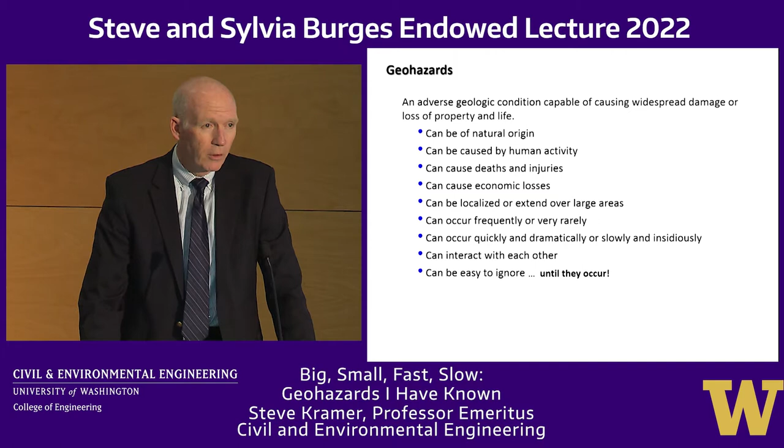Some occur very frequently, some occur only rarely, some occur very quickly and dramatically, and others much more slowly. They can interact with each other and cause additional damage, and they can be very easy to ignore, and they often are ignored, at least until they occur. So some of the examples include landslides, like the Oso slide that occurred in this area a number of years ago, but also flow slides, debris flows, and rockfalls, all capable of causing tremendous amounts of damage.

Earthquakes are important geohazards. They can cause soil liquefaction. Fault rupture can damage structures like this dam in Taiwan. Soils can amplify ground motions very strongly, and in some cases, stronger than the structure was anticipating, and lead to structural problems. And they can cause failure of lifelines, like buried gas pipelines.

Volcanoes certainly are geohazards, not just due to lava, as in Hawaii, but due to lahars, large landslides that come off the flanks of volcanoes, and they're hazards often for Mount Rainier.

Expansive soils are soils that are very sensitive to water. They swell when water is introduced to them. They shrink when the water goes away, and that causes the ground surface to raise and lower seasonally during wet and dry seasons. That causes a lot of damage, particularly to brittle structures, lightweight structures. It causes a tremendous amount of damage to pavements. This hazard doesn't get a lot of publicity, but it causes about $13 billion in damage a year in the United States.

Sinkholes are a big problem in certain areas like Florida, where they have a lot of limestone, and the limestone will dissolve in water, so flowing groundwater produces caverns that, if they become large enough, have a roof that collapses.

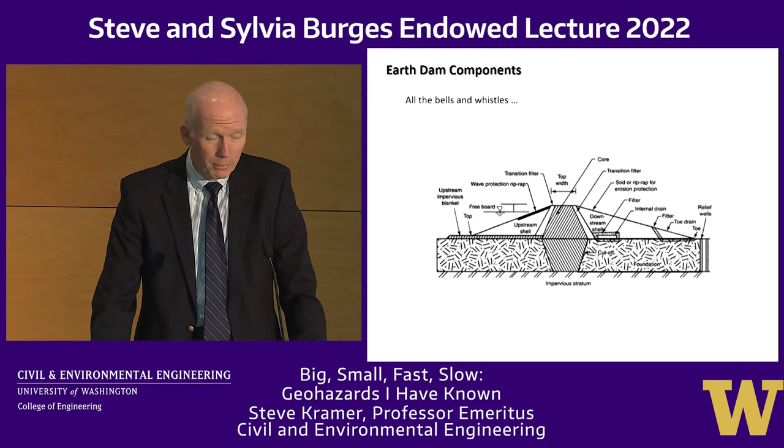Earth dams can be complicated. They're put in complicated areas geologically, at least often, but they have things like clay cores for impermeability and shells that hold them up, and drains and filters and all kinds of things. All the bells and whistles are kind of indicated here. And I knew that my dam, I called it Kramer Dam, was not going to have all of the bells and whistles, but it would have some at least. It was going to have an 8-foot wide crest, 3-to-1 upstream slope, 2-to-1 downstream slope, and it was going to be almost 900 feet long.

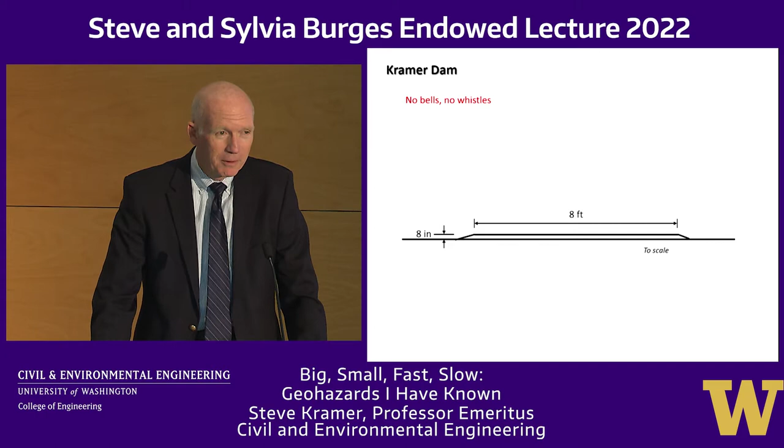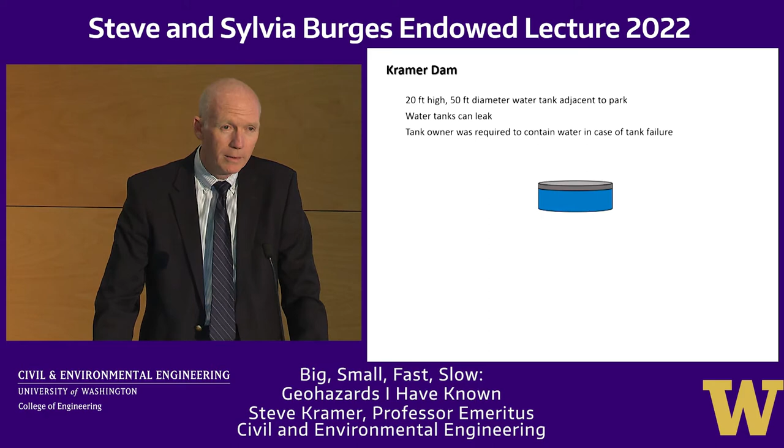So pretty cool. But this drawing turned out not to be to scale, and it's really not to scale because I was then told that my dam was going to be 8 inches tall. So if I drew it to scale, it would look more like this. And my Kramer Dam turned out to be needed because a water tank was going to be constructed on a level plot of ground near a park. And water tanks can leak, and the owner of the tank was required to contain the water in case the tank failed. And so my dam, Kramer Dam, provided that containment. I'm happy to say it was successfully constructed in 1982. Don't have any photographs, but it marked an illustrious start to my career as a geotechnical engineer.

So we'll move on to something a little bit bigger. I'd like to talk about some projects that I've been involved with. They don't necessarily all use or are based on my research. Some of them did. Some of them should have maybe. This is one of the early ones that I got involved with, called the Storegga slide, which is a very large landslide, a submarine slide that occurred off the coast of Norway about 8,000 years ago. It removed 2,500 to 3,500 cubic kilometers of sediment, generated a tsunami that struck Norway, Scotland, the Shetland Islands, and the Faroe Islands with run-ups up to 30 meters, 100 feet.

The head wall is 320 kilometers long. It ran out to 400 kilometers and then continued as a turbidity current and deposited turbidites more than 900 kilometers away. It became of interest because of the 1997 discovery of the Ormen Lange gas field, which was the third largest gas discovery on the Norwegian shelf. Oil and gas are big business in Norway. Their country depends on that in many respects. And so it was a consortium of oil companies that did the exploration, and Norsk Hydro and Shell Norway were the leaders of it, and they were responsible for investigating the development of this gas field.

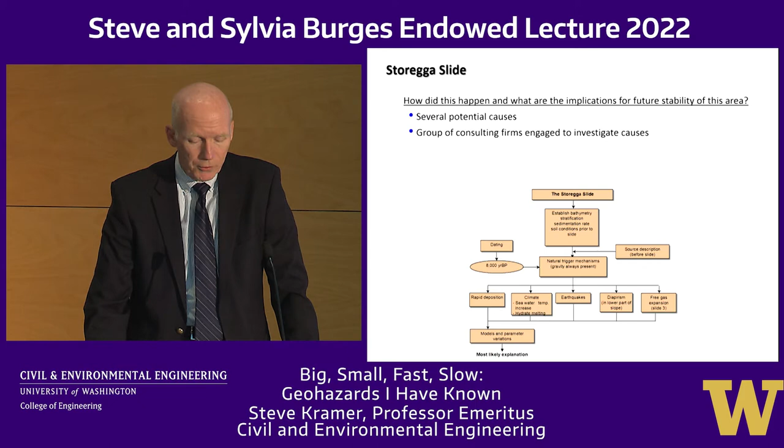And they came up with an approach that's described in the flow chart here. There were about 5 potential causes that were initially investigated, and that was narrowed down to 3 pretty quickly. They also assembled a multidisciplinary team of experts to review these investigations and advise them as they went through their processes. And this included geologists, tsunami experts, sedimentologists, seismologists, oceanographers, and an earthquake guy, who was me.

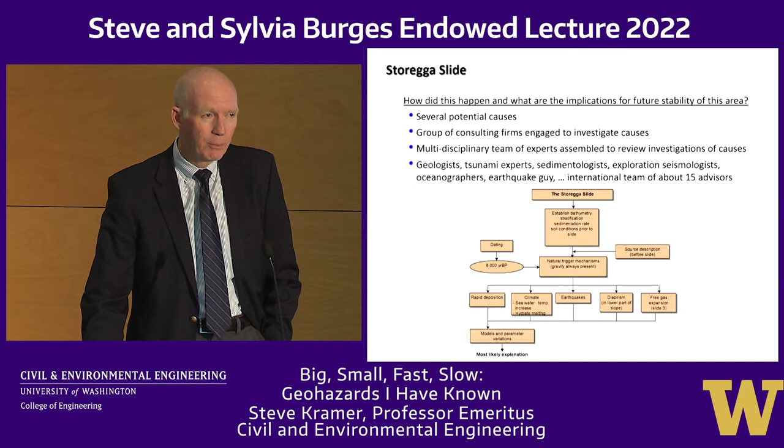It was a very international team. There were probably 6 or 7 countries represented on this, and a really, really interesting group of people to work with. Of the causes, one was rapid sediment loading.

As these sediments were being deposited, if they were deposited very quickly, they would tend to build up pore water pressures within the sediments. And it was known that a lot of landslides had occurred repeatedly coming off of the North Sea fan. They've been measured and dated back as far as 500,000 years. Numerical modeling of this whole process indicated that there would be pore pressure ratios on the order of 20 to 30% or so. So significant, but not enough to explain the triggering of that particular landslide.

Gas hydrates was another possibility. I knew nothing about gas hydrates going into this process, but they could have melted as the waters warmed after the last glaciation. And gas hydrates are mixtures of methane and water that freeze effectively. And when 1 cubic meter of gas hydrates thaw, it produces 164 cubic meters of gas and a little bit of water. And so when these things thaw out underground, the pressures, the expansion pressures that are developed are tremendous.

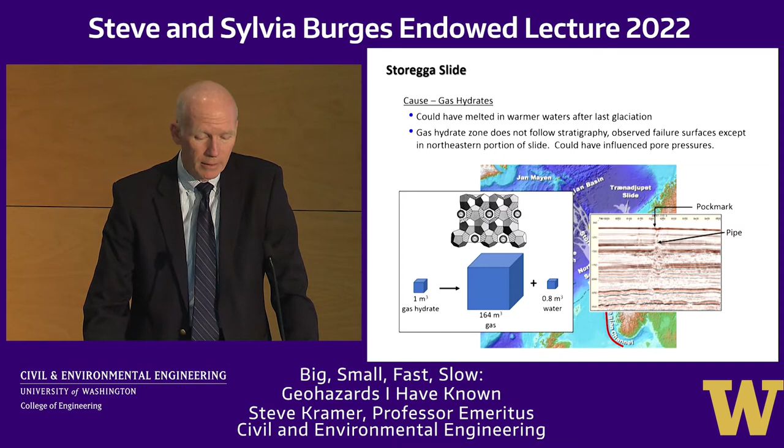And they can cause gas to flow up towards the surface and be ejected explosively at the surface. They create large craters. They're referred to as pockmarks, and they're visible in bathymetry all around the North Sea area. But the gas hydrate zones in this particular area didn't follow the stratigraphy or the observed failure surface, except for part of that slide. They could have influenced the pore pressures, but it was not thought to be capable of having triggered that landslide. The third main cause was earthquakes.

And earthquakes in this region were caused by isostatic rebound of the Earth's crust after the weight of the glaciers went away as the glaciers receded. And from faulting in Norway, magnitude 7 or greater earthquakes were likely to have occurred in this region. It's still the most seismically active area within that region. And so the conclusion that was come to was that an earthquake was likely the trigger for the Storegga Slide that had occurred.

So there were concerns on the part of the consortium and the Norwegian government about the safety of this potential development, the risk that they would be undertaking in developing it. The development was going to require templates, large steel templates that would be anchored to the seabed. Each template had 8 cells in it through which drilling would take place. The gas that was removed would have to be sent to an onshore gas processing plant in Nyhamna on the west coast of Norway through 2 30-inch pipelines.

There are strong currents in this area, about 1 meter per second. And so the pipelines needed to be protected. So they'd be trenched in areas where that could be trenched with softer sediments, and they'd have to be covered by rock fill in other areas. That gas was going to go to the UK, and that was going to require construction of a 1,200-kilometer pipeline from Norway to the UK. So this was an enormous project that was going to require billions and billions of dollars to develop.

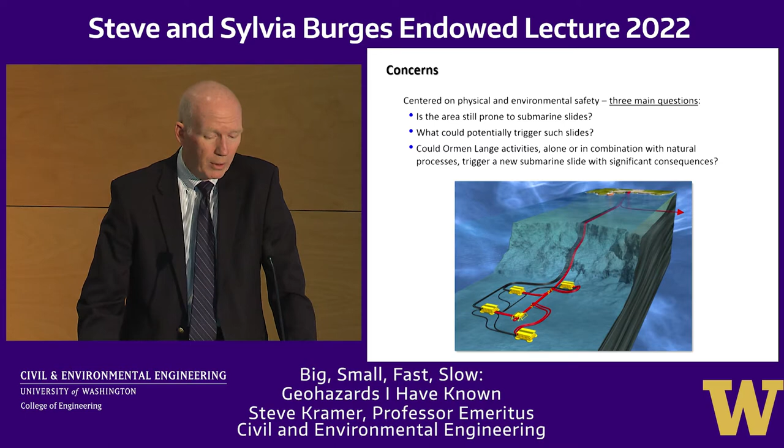So the safety considerations centered on 3 main questions. Was the area still prone to submarine slides? What could trigger those types of slides? And could the activities associated with developing this gas field in combination with natural processes trigger a new slide that would have severe consequences? So the instability threats were divided into 3 categories.

One was very large Storegga-like slides. Another was smaller slides that could have wiped out multiple installations, and then smaller slides that could have threatened pipelines and individual installations. And so there were the natural mechanisms that had been discussed previously, and then there were a series of mechanisms that could have been caused by the proposed or anticipated construction. Anchor forces, rock filling, temperature changes due to the drilling, well blowouts, subsidence due to depletion of the reservoir as the gas was removed, and then induced seismicity.

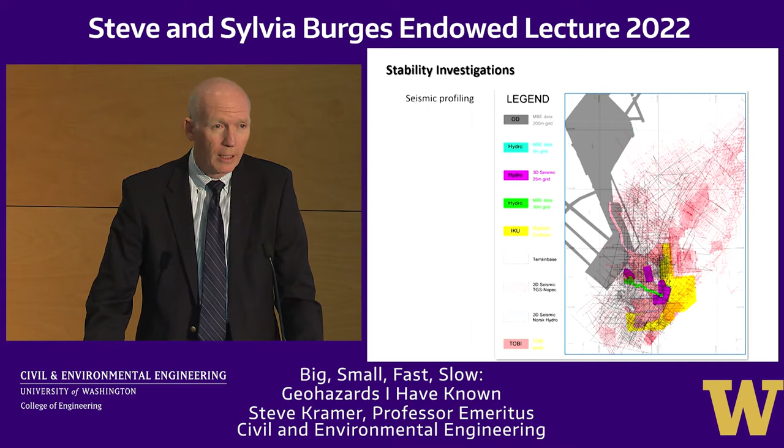And so this initiated a tremendous investigation. These are the seismic profiling lines here. They show up nicely. There were hundreds, if not thousands, of P-wave velocity profiles that were developed to essentially look under the seabed. It's kind of like an ultrasound in many respects.

That was supplemented by borings that were put in under very difficult conditions. You had to go through 250 to 1,600 meters of water before you hit the seabed, and then drill 500 meters through very difficult materials in order to advance your borings. But that was done, and all of that information together provided knowledge of the bathymetry of the region, of the surface texture, and of the stratigraphy, which included both glacial and interglacial deposits.

All of this information led to an understanding of the original Storegga slide. It had initiated about 150 kilometers downstream or downslope of the current scarp, and then worked its way backward through a series of retrogressive slides, as landslides often occur. It stopped when it reached the overconsolidated material, the material that had been compressed by the weight of the glaciers and was denser and stronger.

So this kind of combined geologic engineering model of the original Storegga slide was very helpful in investigating the current stability by means of static and dynamic slope stability analyses, runout analyses, tsunami analyses based on potential landslides that could have generated them. All this was done within a risk-based framework and came to the conclusions that none of the project-related activities were capable of causing such large landslides. And a really big one was impossible, largely because there was nothing left to slide. All the soft stuff had been taken away by the Storegga slide.

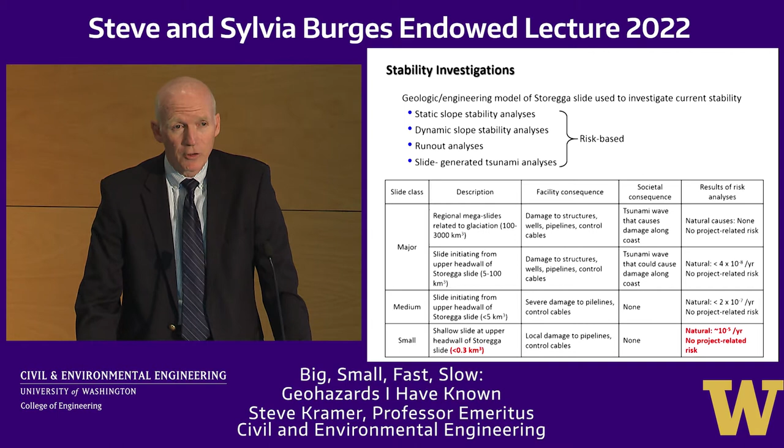And so the Storegga, or the Ormen Lange field was developed. It began pumping gas in about 2007 or so, and has continued since that time and provided a source of energy without any, at least geohazard-related, difficulties.

So it was, to me, very interesting to work with this interdisciplinary group of people to see the state-of-the-art tools that they all had to use, the technologies that they used to address this problem that had many, many moving parts. Very interesting to work with them and learn about their disciplines and to see how people address problems in those disciplines. It was very different than things that I would do, for example, in many cases.

The emphasis there was on getting it right. Both the government and the consortium of oil companies had risks and rewards associated with developing this field. And they put no pressure on us to sway things one way or the other. They really wanted to know what was the actual hazard that they were facing there.

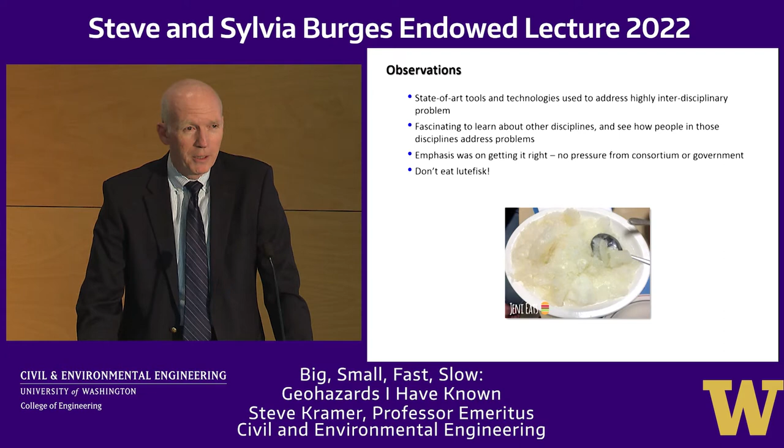I also learned, in that there were a number of trips to Norway for meetings, and I learned, don't eat lutefisk. If you have to be polite, make sure there's a lot of beer on the table. It's the only way to get that stuff down.

So next I'll move to the fast category. And this is a landslide that occurred just a few years ago in Brumadinho, which is in the eastern part of Brazil, north of Rio de Janeiro in Minas Gerais state. The large city that it's closest to is Belo Horizonte, but it's closer to the town of Brumadinho, a relatively small town to the southwest.

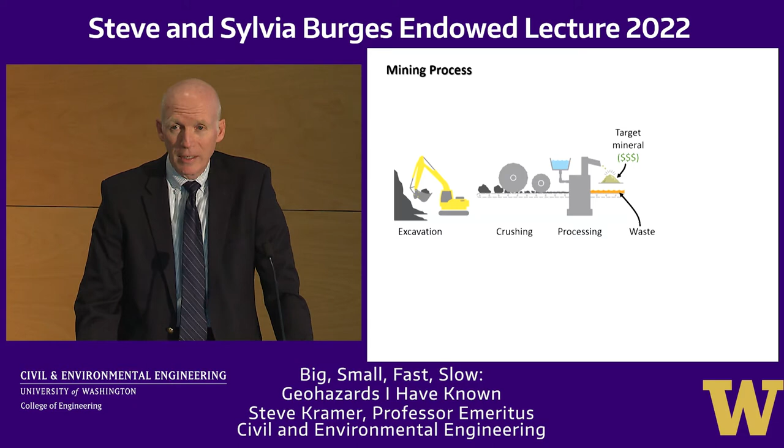In this mine, as in many mines, the process involves excavating rock, crushing that rock into gravel, sand, silt, and clay-sized particles, and then processing it to extract a target mineral. The target mineral was iron in this case, but there's a lot of waste material that's left over, the gravel, sand, silt, and clay that doesn't have much ore in it. And that has to be disposed of, and that disposal usually takes place by moving it into a storage facility. And so this waste material we refer to as tailings.

And tailings are typically transported to tailings storage facilities hydraulically. They're mixed with a bunch of water and pumped or sluiced to the desired location and deposited there. It's a very cheap and efficient way to move large quantities of soil. It's what was used in the Denny regrade here in Seattle. They're used to fill in the old tide flats where now our stadiums are existing.

And so this tailings is pumped through a tailings discharge pipe, and then it's released through spigots, and this material flows down the slope. The water and the soil. The large particles that are heavier settle out first and form what's referred to as a beach behind a tailings dam, and then the finer particles go out into a settling pond where they eventually will settle out of suspension.

The tailings, in both cases, the coarse-grained and the fine-grained particles, are deposited by settling down slowly through water, so they're in a very loose structure. And so the great efficiency of this procedure with respect to the cost of moving large quantities of material is also very efficient for creating liquefiable soil deposits.

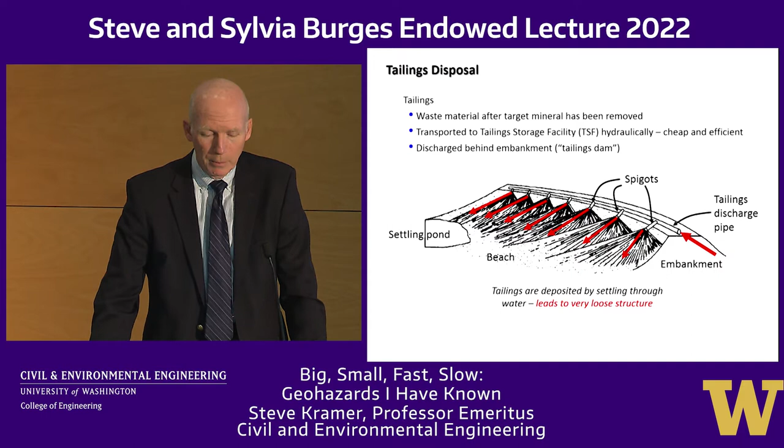And those fine-grained soils are going to impede drainage. They're going to weaken that beach area, and the design of these things relies on basically a granular beach, a free-draining beach, to have the strength to maintain stability.

So there's different ways in which tailings dams can be constructed. A historically common procedure is referred to as the upstream method. In this method, you start with a small starter dam down at the bottom. You fill up the area behind it with tailings, and then you build another small dam on top of the last dam. So part of that dam is supported by the previous dam. Part of it is founded on tailings themselves. And you keep building this up until you get to the top.

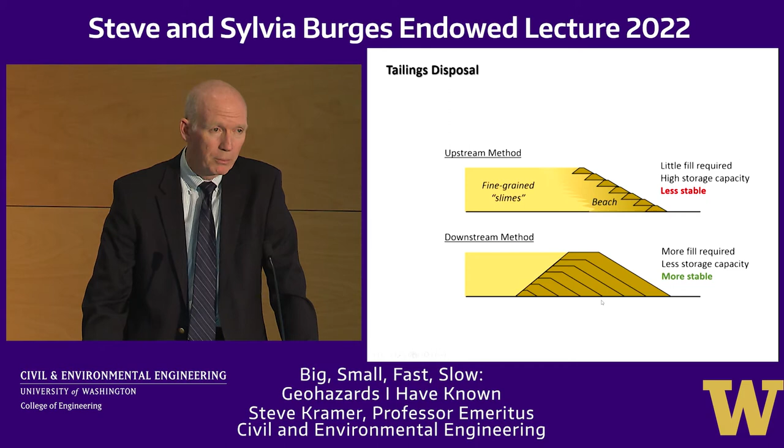The Dam 1 at Brumadinho was constructed using the upstream method. And so they built a starter dam in 1976, filled it up, and then continued raising it in a series of raises after that. There were stability concerns after the third raise, and so for the fourth raise, the designer specified that it be set back to try to flatten out the overall slope a bit. And so the rest of the raises were constructed that way.

Some of the embankments had low permeabilities, which is not desirable because it impedes drainage of water from the tailings. There were a couple with drains, but there was no internal drainage, which also would have been highly desirable. The 10th and final raise was constructed in 2013. The last fill was placed in 2016, and we ended up with an 86-meter thick pile of tailings here. The dam had a crest length of 720 meters, and it looked like this a few years after construction.

There's a former pond area, which has by that time been overgrown with grasses and shrubs. There were surface drainage channels to deal with surface water and keep it from getting into the tailings. There were also surface water interceptor drains to keep water from coming off the hillsides and into the tailings. The setback area is shown here.

There was a water dam that retained water for the processing plant that was off to the side. It's referred to as Water Dam 6. Looking at it from a different view now, you can see the Dam 1 here and Water Dam 6 over here. The processing plant was located about here.

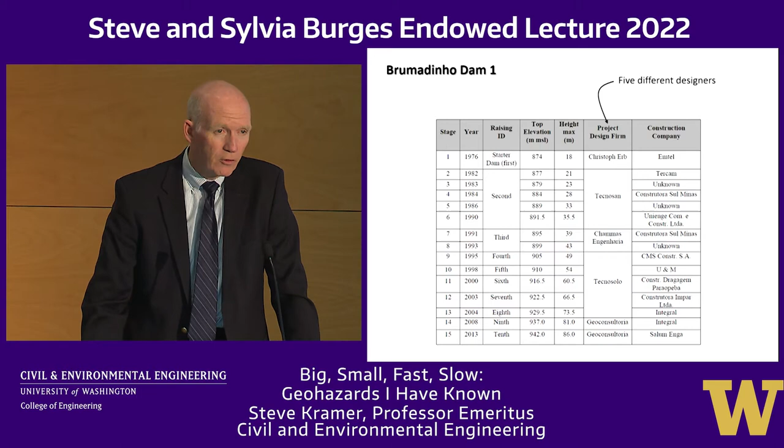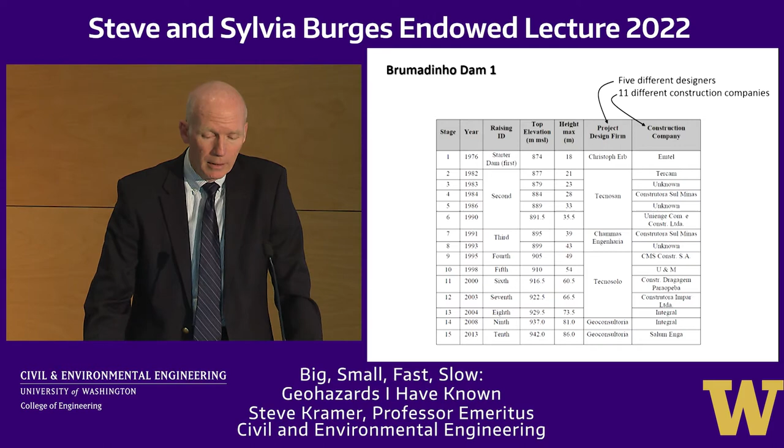If we look at the records of construction, they're notable for the fact that these raises were designed by 5 different designers and constructed by 11 different construction companies. So very inconsistent in the designs, the analyses that were done to support the designs, the kind of the philosophy of how these things were being built. It's not the best approach to take in a situation like this.

They did perform stability analyses for each of the raises. The possibility of liquefaction was not considered, despite the fact that they had very loose saturated materials, granular materials. This is not a seismically active area, and the engineers there believed that liquefaction would only be caused by earthquakes. My PhD research was on static liquefaction. I ended up doing a lot of earthquake stuff, but it wasn't part of my PhD work. Liquefaction does not require earthquakes in order to occur.

Each of these stability evaluations was reviewed and approved by a safety auditor, an independent firm that was engaged to do that. The stability was generally evaluated using drained strengths, assuming that the tailings had been developed slowly and that pore pressures were very low. They did some analyses using undrained strengths, but peak undrained strengths, which are considerably higher than the strength that a liquefied soil would have.

There were concerns about high water levels within the tailings, and so in early 2018, they began installing deep horizontal drains from the face of the dam back into the tailings to attempt to draw down the water level within the tailings. If the water level would come down, the effective stresses would increase and the dam would become more stable.

In December of 2018, they began installing some vertical borings in order to install instrumentation, piezometers to measure pore pressures, inclinometers to try to measure deformations. They got 9 of them in by January 20th of 2019. On January 21st, they began the 10th boring, and 4 days later had reached a depth of about 66 meters. On January 25th, they were out continuing to advance that boring.

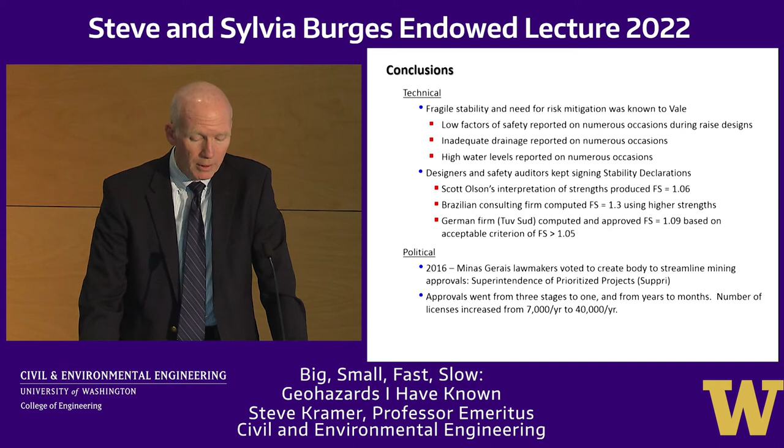I used to see this in the lab when I was doing my PhD work all the time. Creep of granular materials is generally not recognized, or at least underappreciated. This was complemented by a loss of capillarity-induced strength by saturation with surface water that had gotten into the embankment.

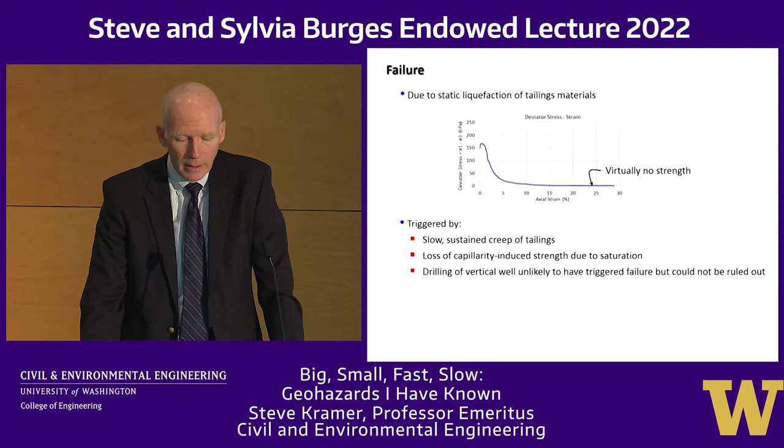The drilling of the vertical well was postulated as another potential cause because it was occurring right at the place and the time where the failure occurred. It can't be ruled out, but it seemed to us to be very unlikely. In the aftermath, 16 people have been charged with homicide for this, including the CEO of Vale.

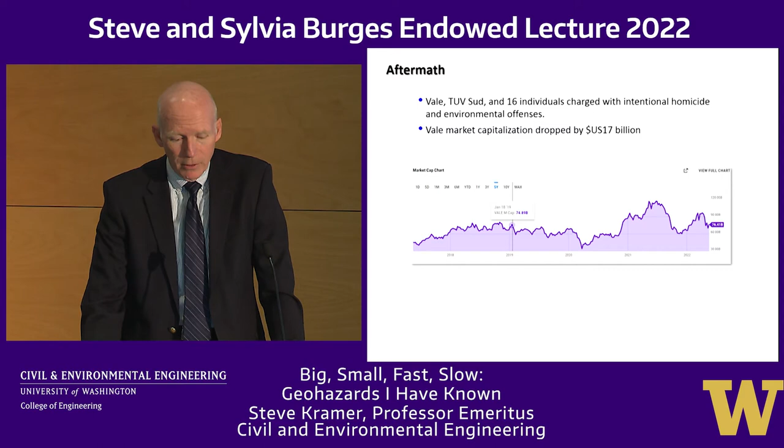Vale's market capitalization dropped by 20%. It's recovered since then. They've been ordered to pay a fine equivalent to $7 billion for social and environmental damage. Our Securities and Exchange Commission just 3 weeks ago sued Vale for raising money from investors fraudulently. More than 20 other Vale tailings dams are considered to be dangerous, and residents below 10 of them have been evacuated from their homes now.

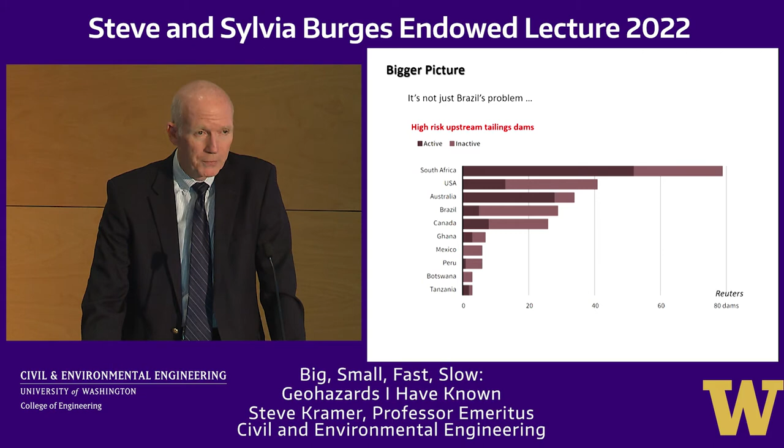If we restrict ourselves to these upstream tailings dams that have high risks associated with them, South Africa is by far the leader, and the US is in second place. So this is really a global problem. Static liquefaction is an important, pervasive issue in the tailings business. These materials can creep, and so if it's stable, it doesn't mean it's going to stay stable necessarily. It needs to be looked into. More research is needed. There are groups that are forming to try to advance tailings engineering practice.

Mining is a big business. I think everybody realizes that. Disposal of tailings is a significant cost to them. And some companies put safety, long-term safety, in the back seat compared to short-term profits. That's what happened in this case. Corporate governance and communication plays a huge role in the safety of these types of facilities. Bad news needs to be given, it needs to be heard, and it needs to be acted upon. That did not happen in Brumadinho.

Engineers need to be involved in corporate governance and have the ability to communicate with decision makers. That didn't happen in Brumadinho. There are a lot of tailings dams that have substandard designs, substandard construction, and they're dangerous. So it really is a worldwide problem.

So finally we get to the slow case. Another relatively recent one. This is the Millennium Tower, a high-rise structure in San Francisco. It's in the South of Market area, bounded by Mission Street on the north, at least project north, and between Fremont and Beale Streets. It's a luxury high-rise tower, 58 stories. Joe Montana lived there, which if you're from San Francisco, would make everybody want to move there.

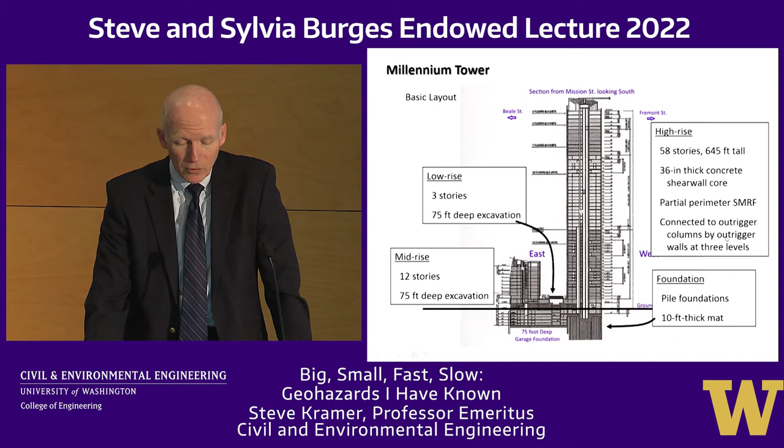It's right across Fremont Street from the Salesforce Tower, and Salesforce now kind of dominates the San Francisco skyline. The poor Transamerica Pyramid is kind of an afterthought now. It's a massive building, and it's right across the street from the Millennium Tower, which is quite a bit shorter. The Millennium Tower complex actually consists of 3 structures: a high-rise that's 58 stories tall, a mid-rise structure that's 12 stories tall, and they're connected by a low-rise structure. The high-rise is the one we're interested in. It's supported on piles that we'll talk more about later.

The subsurface conditions here consist of, underneath the structure, 15 feet or so of young Bay mud, a very soft, compressible, normally consolidated material. It's weak. You wouldn't build anything of any consequence directly on San Francisco Bay mud. Below that is a marine sand that's about 30 feet thick, a uniform sand, some clay in it, medium dense to dense. Below that is the Colma sand, which is a very dense, silty fine sand. It has some clay. The clay is hard within it. It's been used as a bearing layer for years in San Francisco foundation design.

Below that's the Old Bay mud, or the Old Bay clay. That's highly plastic, over-consolidated, stiff to hard. Over-consolidation ratio averages about 2 in the upper portion and about 1.7 below that. And bedrock is about 200 feet deep here. So the tower was originally going to be a steel frame structure, but it was changed to a concrete structure because steel prices were fluctuating rapidly, and fluctuating up more than down, so concrete turned out to be cheaper, and the developers chose to change it.

Originally, parking was going to be below the high-rise tower, and there's a benefit to putting parking below a high-rise because you're going to excavate out a lot of soil and compensate for a lot of the weight of the building that you're going to build. And they decided to move that parking to be under the low-rise and mid-rise sections so that they could get the high-rise tower built sooner and supposedly sell the condos faster and start getting revenue coming in from this project.

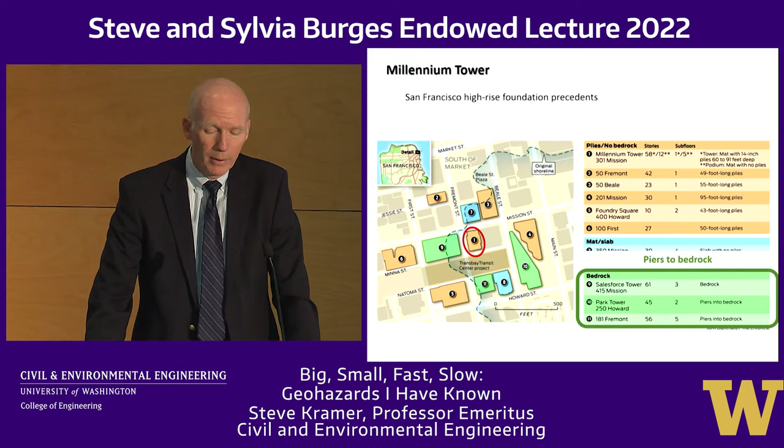So the situation kind of schematically for the Millennium Tower high-rise looked like this. There were 950 14-inch precast concrete piles driven into the dense Colma sand layer. They were connected by a 10-foot thick, heavily reinforced mat. They required an excavation, so they had to dewater the excavation. That meant pumping out water, drawing the groundwater level down around that excavation. When you lower the water table, the effective stresses in the soils increase and consolidation occurs, so more settlement occurs.

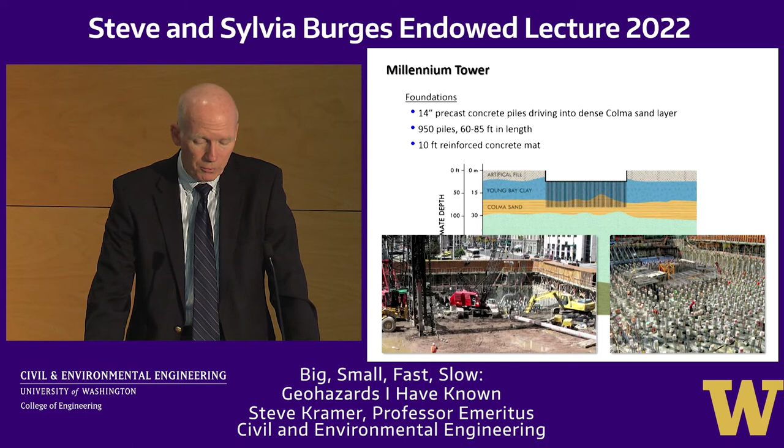They ended up with effectively a forest of piles down there, and here's this photo taken shortly before the mat was poured. So the stresses now, the weight of the building, are being transmitted by these pile foundations down to the Colma sand. And it's going to impose stresses on that Colma sand, but more importantly on that Old Bay clay, this over-consolidated clay. Usually materials that are considered to be heavily over-consolidated don't consolidate very much, but these were heavy loads.

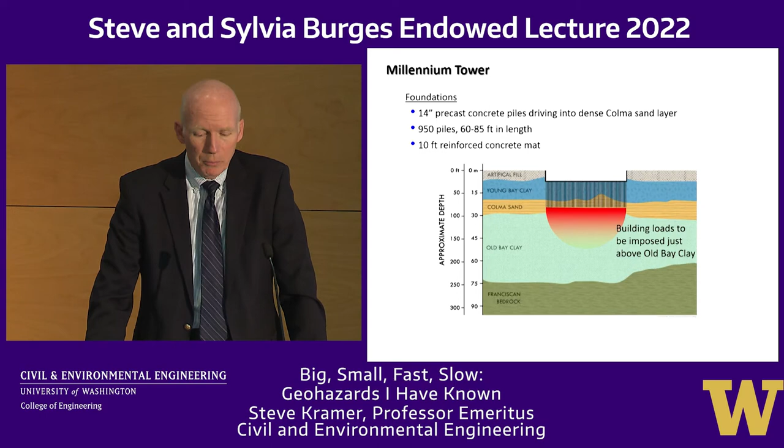And so settlement calculations needed to be performed, and they were performed by the designing geotechnical firm. These were based on their subsurface investigation, based on laboratory tests that they performed and that other people had performed for surrounding projects previously. They predicted ultimate settlements on the order of about 4 to 6 inches or so. And they monitored settlement as the building was being constructed. And by the time it was completed, and certificate of temporary occupancy issued, they had more than 8 inches of settlement before anybody could even move in.

But they continued to sell the condos, and settlement continued. They started suffering damage, cracks in the basement walls, water getting into the garage, differential settlement between the high-rise and the low-rise section. Eventually, they needed a ramp in the lobby for residents that use wheelchairs. There was damage on the outside of the sidewalks and the cladding. So this settlement continued to occur. It became known to the city in about 2008. There's evidence of a lot of emails going back and forth between the city and the designers and the contractors.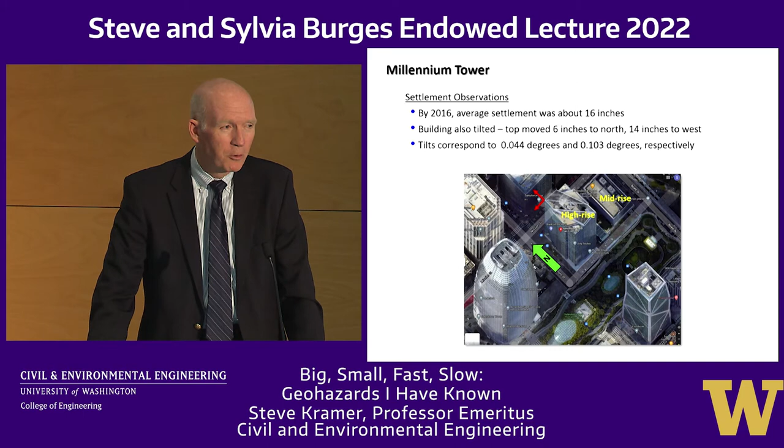That settlement was accompanied by some tilting. The top of the building moved about 6 inches to the north and 14 inches to the west. The tilts corresponded to relatively small angles, but they were noticeable. If you went into one of the condos and put a marble on the floor, the marble would roll. The marbles would probably roll in my house, but this was due to this tilting.

The general public became aware of this in 2016 when 60 Minutes decided to do an episode devoted to the Millennium Tower. And so when 60 Minutes comes to town, you know you've got trouble, I guess. And their story led to other stories. And if you are the designer or the builder or a resident of this structure, you don't like to see this sort of thing. It became notorious. There was a stigma attached to the Millennium Tower, and property values plummeted.

And a lot of the residents here were older people who had retired and put their savings, their equity, into condos here. They wanted to live in downtown San Francisco and walk to everything and have all the cultural benefits. And this was really a traumatic thing for them. So, as you can imagine, particularly now that we're in the US, litigation ensued. The main parties were the Homeowners Association within the tower, the developer, and the Transbay Joint Powers Authority, which was developing the Transbay Transit Center adjacent to the Millennium Tower, was also named in these suits.

Salesforce was named, and this building just to the north, 350 Mission, was also named in some of these lawsuits. There were many subcontractors involved, as you can imagine. There were many insurance companies involved. There were many, many attorneys. The first email I got after getting involved with this was CC'd to over 200 attorneys. I counted them. There were a lot of experts.

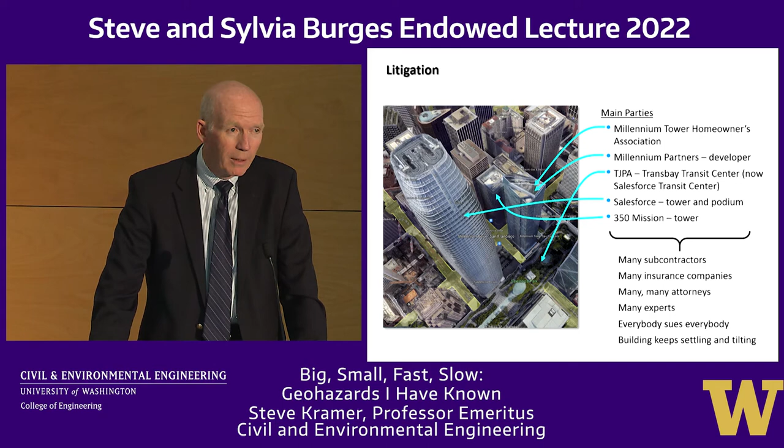All the attorneys started hiring experts. I knew almost all of them. And they all had affiliations with the various parties. And basically everybody sued everybody. So it was a mess as far as I could see. But while all this was going on, the building was still settling and it was still tilting.

Originally, the lawsuits would normally be handled in court, but a trial would have been extraordinarily complex. It would have taken several years for the trial even to occur, and the appeals would have taken another 15 to 20 years. And nobody really had the stomach for that, particularly the retirees who had bought into the Millennium Tower. They didn't have 15 to 20 years to wait for this sort of thing to happen.

And so there's a mediation team that was headed by Dan Weinstein. There were 2 retired judges and 3 very experienced attorneys that had expertise in various aspects of this case. And they were going along trying to understand geotechnical engineering and listening to all the experts, and they finally threw up their hands and said, we need some help. And so I was asked to become what's called a neutral expert on this case.

And so my job was to be neutral, to advise them on the technical aspects of the case and kind of translate engineering talk to English, to provide an unbiased basis for allocation of the responsibility for the losses that had been incurred here. So I had to decide who was going to pay how much on the basis of at least the technical considerations, which were not all of the considerations at play here. And then I provided input to selection of the fix that was going to take place here to try to stop the settlement and recover some of the tilt that occurred.

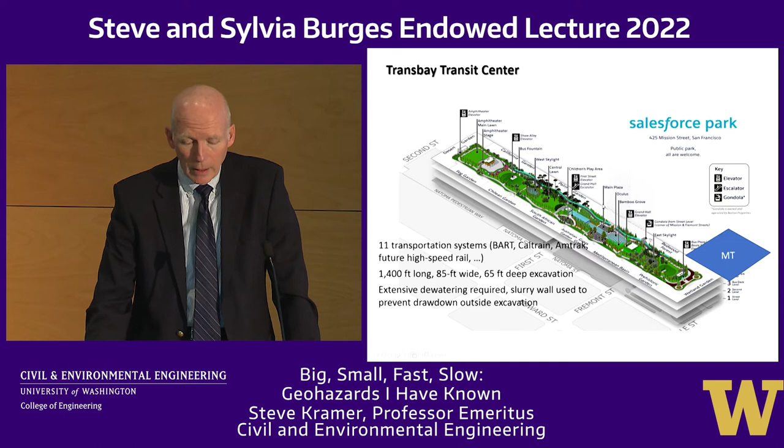These other parties, the Transbay Transit Center was a really cool structure, but as far as this case was concerned, it was a hole in the ground. It was a 1,400-foot long, 85-foot wide, 65-foot deep hole in the ground that shared a property line with the Millennium Tower. It's a big excavation. They had to do dewatering, and they used a slurry wall to try to prevent the effects of their dewatering from going out beyond their property, and they had mixed success with that. Here's the excavation, the bracing. It was a big project in and of itself.

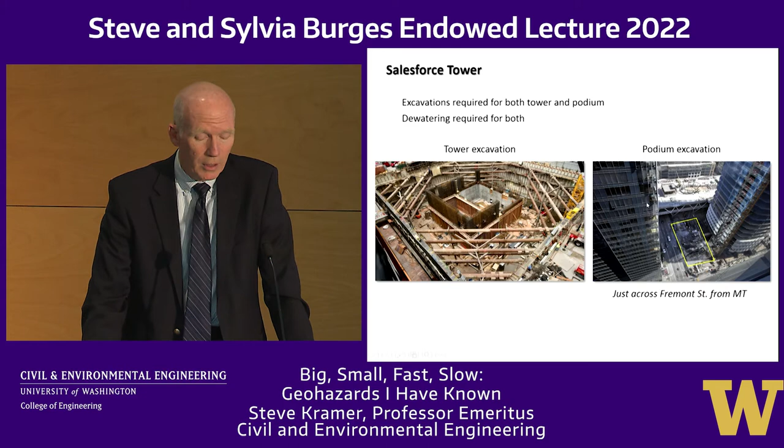Salesforce had excavations for both the tower and the podium structure adjacent to it. Here's the tower excavation. Here's the podium excavation. The Millennium Tower is on the left here. The Salesforce Tower is on the right. It's just across the street from the Millennium Tower. And so these wells, these dewatering activities had the potential to draw down water levels and potentially influence the settlement and tilt of the Millennium Tower.

The 350 Mission Building was a shorter building just to the north. It only had a 32-foot deep excavation. They did some dewatering, but this was not considered to be a major player in this particular case.

The different parties had their positions. The Homeowners Association said the original design was deficient, the construction was defective, they were dewatering for too long. The Transit Center contributed to the settlement and tilt with its construction activities, and the Salesforce Tower did the same thing. The developer said that the settlement and tilt was stabilizing. It was going to be okay, but it accelerated after the adjacent construction began, and they blamed the Transit Center, Salesforce, and 350 Mission for contributing to the additional settlement and tilt.

The TJPA, which was essentially the Transit Center, said that the original settlement calculations were flawed, that the Millennium Tower had already settled and tilted excessively before the Transit Center construction even began. And they had instrumentation records and pumping records to refute the arguments that their excavation bracing had moved or their dewatering had caused problems for the Millennium Tower. And Salesforce had essentially the same position as the TJPA did.

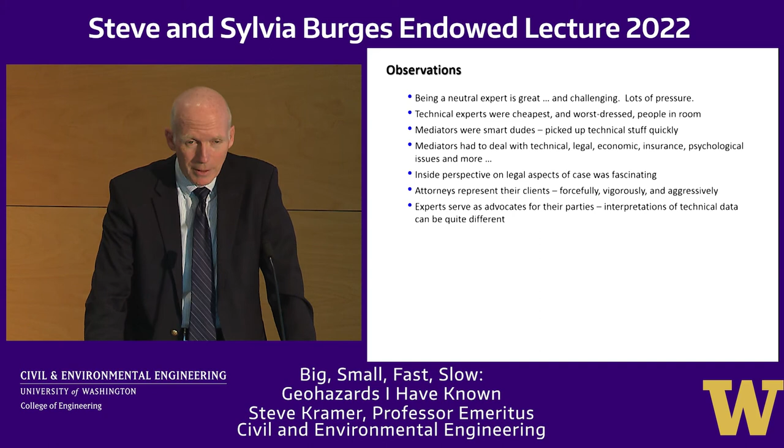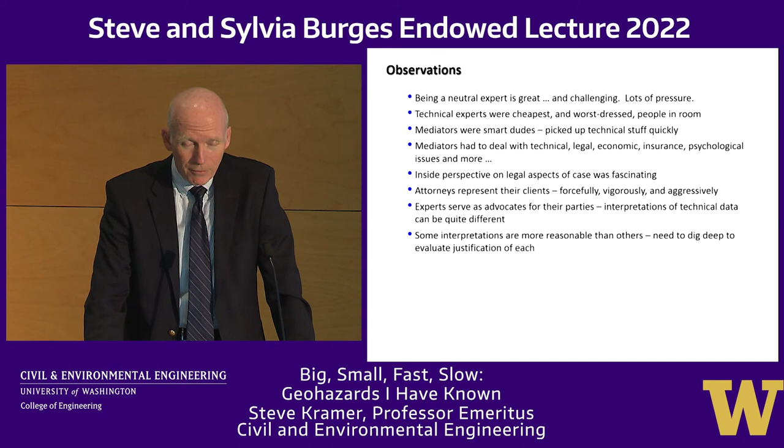Experts serve as advocates for their parties, and their interpretations of technical data can be quite different, and it can be challenging to try to get people, even dealing with what you think would be factual information, to kind of converge on something that is more appropriate. So some of these interpretations are more reasonable than others. You really need to dig deep to evaluate how each of them can be justified.

So to summarize, I hope I haven't gone on too long. Geohazards are important. They affect the physical and economic well-being of people and their communities. They're also interesting. They involve interactions with soil, rock, water and structures. Those are all technical aspects that are interesting, but when you get involved with larger projects like this, you start to see how the interactions with people become more important. It's something you don't often see in a research type environment.

These kinds of projects and my work here for 36 years at the UW allowed me to go to places I never would have imagined going to and doing things I could never have dreamed of doing. I enjoyed my teaching here. I enjoyed the research. I enjoyed my service activity, most of it. Enjoyed my colleagues in the geotechnical group very much. Enjoyed my students. Enjoyed the big, interesting, difficult, real-world projects that I've been able to work on.

And I'm enjoying my retirement, especially getting to spend it with the person who's helped me make all of this stuff possible and supported me over all these years. So thank you very much for your attention.